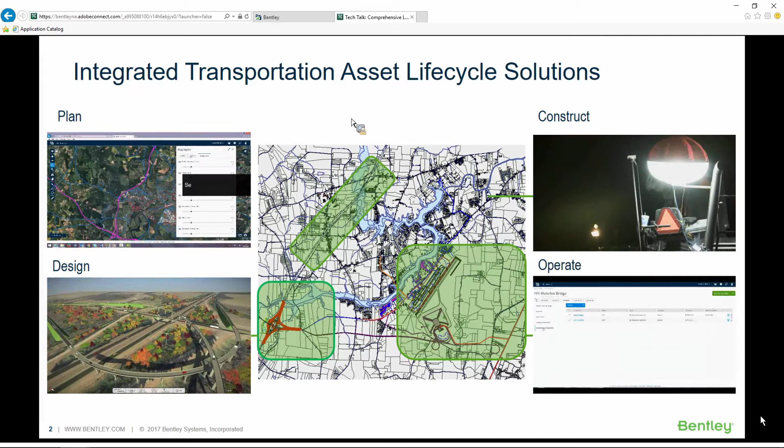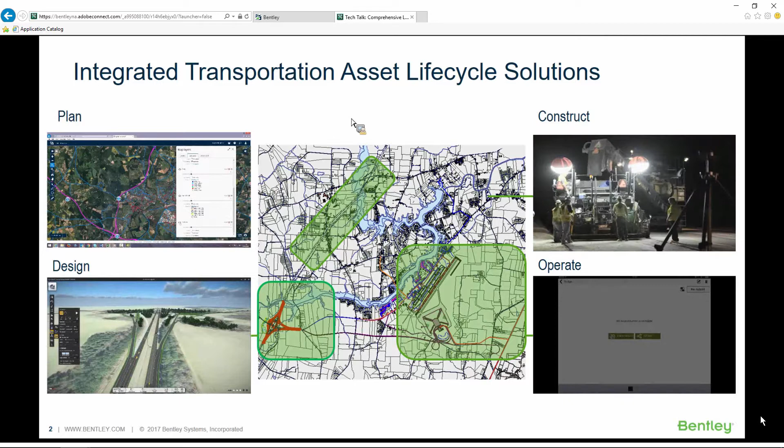From a point of view of AssetWise itself, from a Bentley point of view, one of the differentiators for us is that many of you know us from the design aspects of infrastructure. And what AssetWise does is it moves us also now into the operational and the planning aspects. So right now, from an AssetWise lifecycle perspective, we're going to show you today some of the network management capabilities from the planning aspects, how these interface into the design, right through to construction, and then finally the operation aspects of asset lifecycle information management. And we believe that this, combined with reality modeling, puts Bentley into a unique position in the marketplace to provide you with the solutions to perform asset lifecycle management.

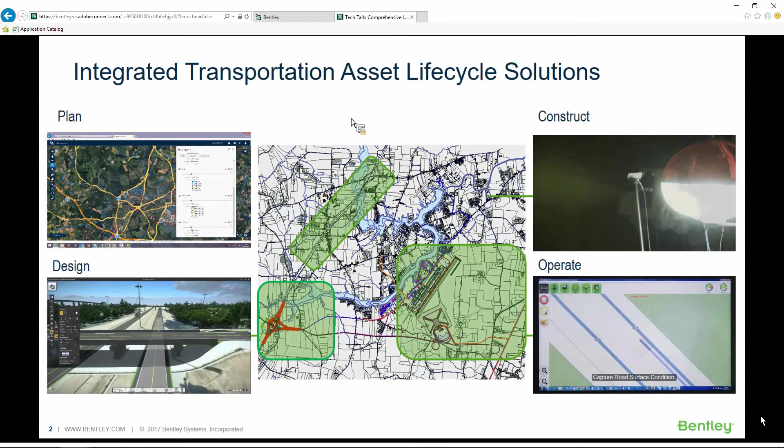So in terms of the Tech Talk agenda today, just to give you a brief agenda: first of all, I'd like to introduce you to AssetWise so you understand how the network management capabilities that we're going to talk about today fit into the portfolio. We're going to talk briefly about why we believe that linear network management is important from a business perspective. We're going to provide you with demonstrations of the new AssetWise ALIM linear network management, so Pano will be giving some live demonstrations.

And then we're going to talk about the effective tools that are part of the solution to support regulatory reporting like HPMS reporting and some of the things that we're doing now for network loading. Then we'll be just showing you some examples of some integration with reality modeling. These are the next steps that we're taking: being able to use 3D modeling during the inspection process with ContextCapture, and then being able to use design information to pass that through to ConceptStation for conceptual modeling of the network, and then also using As-built information to update the linear network afterwards. And then finally, I'll leave you with some closing thoughts and obviously take some questions from you.

So first of all, an introduction to AssetWise. Many of you have probably heard of AssetWise, and we've been obviously doing presentations on this for some time now. But for those of you that are new to AssetWise, AssetWise provides the operational aspects of lifecycle asset management, and we've broken it down into a number of capability areas.

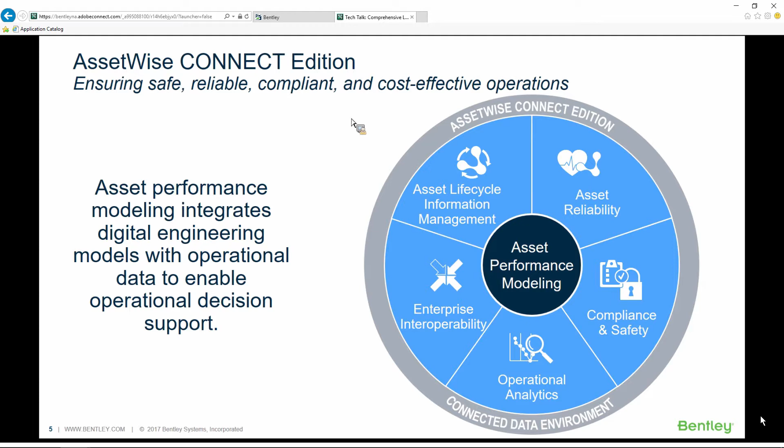So these are the capabilities, and I'll just talk about each of these briefly. First of all, there's the Asset Lifecycle Information Management. In this presentation, you'll hear that referred to as ALIM. And ALIM provides the asset registry capabilities, the linear network management that we're going to talk about today, document control and records management, and also configuration and change management. So this is really the information aspects of asset management and sits at the core of AssetWise.

The next component is AssetWise Reliability, and this is then the inspection processes. So AssetWise itself now has inspection capabilities, the ability to raise defects against those assets as well, and recording the conditions.

Compliance and safety provides a number of capabilities, but from a DOT or from a road network perspective, this is where the permitting and routing capabilities for oversize, overweight requirements are managed. There's operational analytics, and we'll be talking about part of this today. This is where we do the HPMS reporting from. So this is dashboards, analytical capabilities against all of the information either within AssetWise and also externally to AssetWise.

And then there's enterprise interoperability, and one of the important things is that we recognize that not all of your information is always going to be in the AssetWise suite or any of the Bentley design suites. So the ability to be able to interoperate with other applications - these may be your enterprise resource applications, it may be your crash management systems where you're storing information that you need to report against for HPMS reporting.

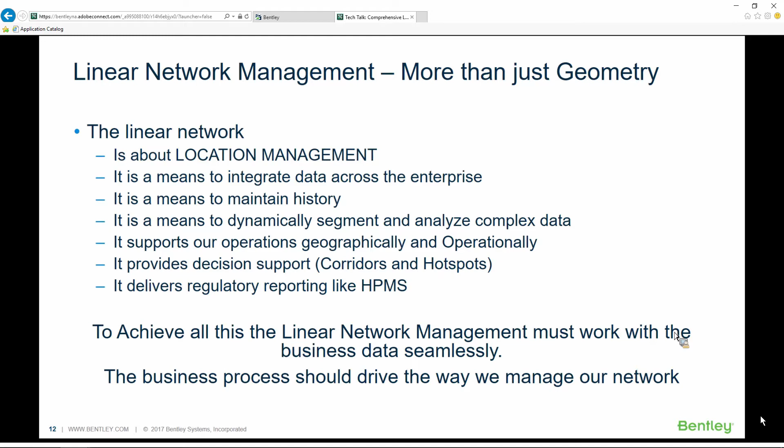And we also believe that the business processes should be driving the way that we manage our network maintenance. So we're going to give you some demonstrations of the linear network shortly.

Just to give you some background of the linear network management capabilities, what you're seeing today is new capabilities in terms of the user interface, but just wanted to point out that what's in the background, the engine, the linear referencing engine that we're using, is built on a time-proven solution.

It's been enhanced and has grown and matured over the past 20 years. So it has extensive global implementations. We have over 40 implementations of this in Europe. We have implementations throughout North America, India, Asia Pacific and Australia as well.

So this is a time-proven solution, although it's fairly new, the user interface that we're showing you today. That means it's got a high degree of functional maturity, and that's important from an age point of view, but it's also important from a global perspective.

So our solution has capabilities that have been requested around the globe and are then made available to everyone in a single solution. It supports numerous linear referencing methods, including NCHRP 20-27, and it also provides advanced functionality that Pano and Paul are going to be talking about, including capabilities like distance gaps and circular routes.

The other aspect as well that's very important is that I'm talking a lot about the business data, making sure the business data remains consistent. But it's also important from a GIS or a spatial perspective that the tool you're going to see today is enabling us to manage the centerline geometry of the road network.

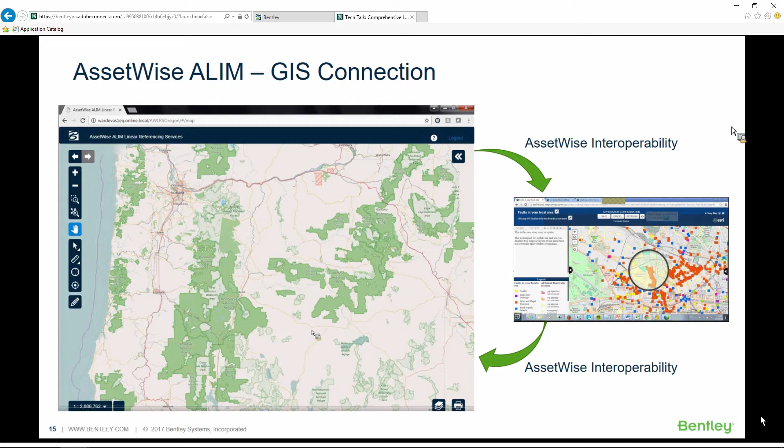So what I'm going to do now is I'm going to hand over to Pano Voudouris, and he's going to talk through these presentations of the AssetWise ALIM linear referencing interface.

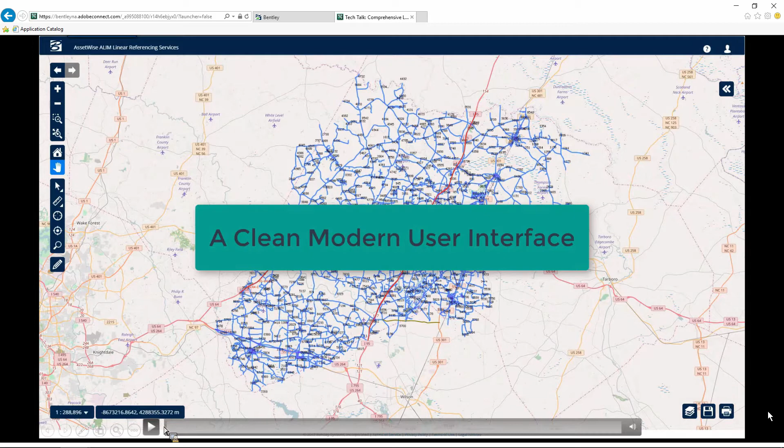Okay, so this is your map. What we're trying, let me start the video, okay? So what you see here is the map, and this is the environment that you're going to use for all your asset and network editing. We try to keep it as clean and as uncluttered as possible.

You see now the toolbar there, which is just business-driven menus, and you got the simple tools that you would expect for any web map. And what is on your map is with blue lines is your centerline data, and the red is the highway route, I should say.

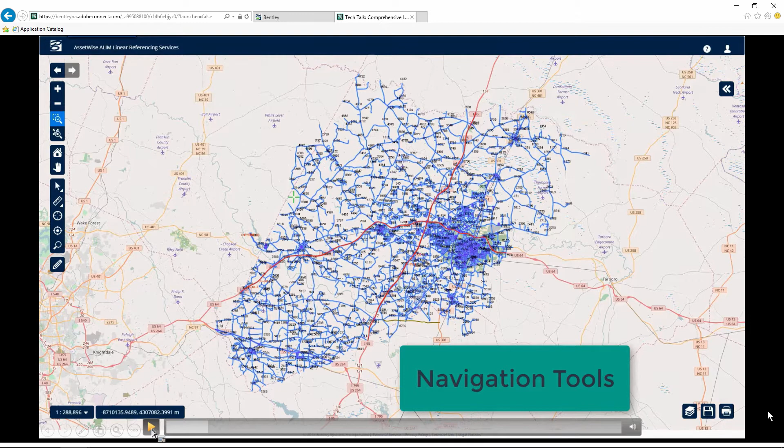If you go to your classic navigation tools, like your zoom in and zoom out, we're here. Okay, so classic navigation tools, zoom and pan and selection tools. We can also go to, you can see that on the top right you can zoom to extent.

You also got the map layer control tool. This is where you control all your layers. You can see all the available layers that you got, and it depends on where you got, if you got permissions to view them.

It's your classic legend layer control, where you can see the legend, change the transparency, and you also got background layers. What we see here is OpenStreetMap, and you can change the transparency of that. You can obviously move the layer order up and down, changing here to the Toner Lite map.

As I said, it's all about the permissions you got access to, and we also provide print options with a simple print where you can select your different paper size, DPIs, and scale, add in a title and a description maybe, and then it will provide a simple PDF map. Let's do that now.

So far it's basically what you would expect from your classic web map interface, right? We got masses of tools. This is your printing tab. Now there are massive editing tools, and so where are all these?

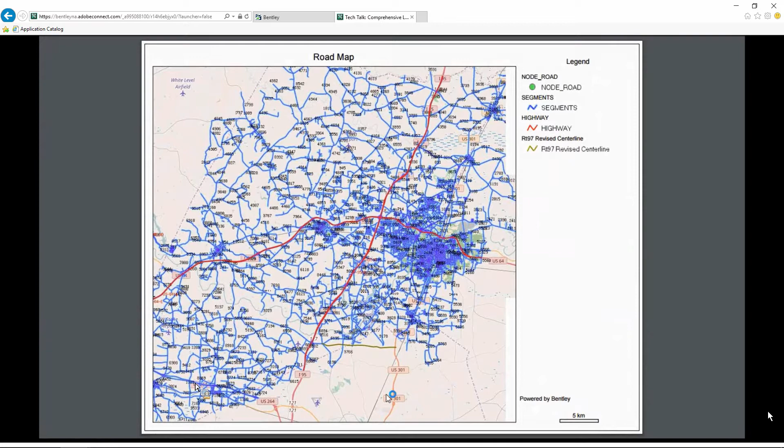The next bit I want to show you is about editing. So network editing again, and it all starts from the same environment and from that little pencil icon there. I click on the pencil icon, I select the layer I can edit if I have permissions, and I've got three tools now: the create, the create trace, or edit. So right now I'm creating something, happened in the video.

So I'm selecting my datum layer, and I'm going to now create, digitize a new datum, a new center line. You can see that I snapped an existing node, an existing center line node, and as per normal, as you would expect, click, click, click, and you just double click to create the datum.

Now, one thing I want to point out is that all the attributes that you see here are user definable. The length has been defaulted to the map length. The units of that map length you can change, and the units are set in the metadata, and you can set the accuracy and precision to whatever your requirements are. Then I enter the attributes and create my new datum.

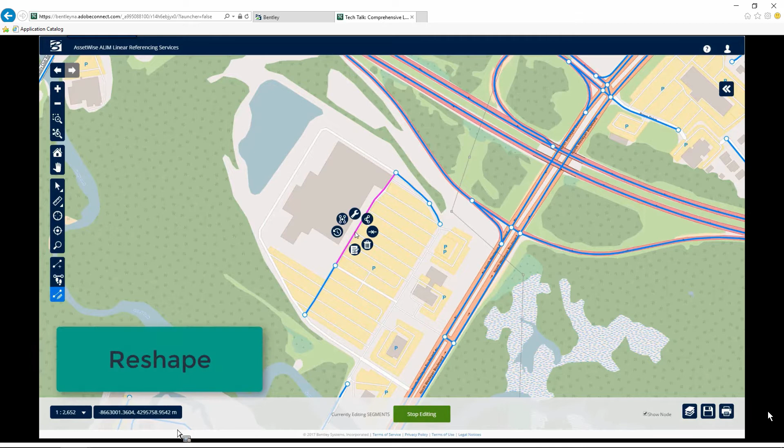So another option is reshape. Again, from the context menu, click on reshape. I won't go into the different tools that we got, but to say that I just want to move a few vertices around. So I click on that. If you see there is a replace and recalibrate as well. So at the same time I do a reshape, I can also choose to change the length, or I can replace, meaning it will just end date that and create a new one. I don't want to do that now, I'll just do a simple geometry reshape. Click on reshape, and my datum got reshaped.

Then I've got a merge, again the opposite from split. I just select my two new datums that I just split. You can see now there's only two options up here, so I can only split it or merge and do a shared reshape. Again, it will just ask me for the attributes of the new merged datum. Click on merge, that's it. Again, quite simple operations, work and quite easy to use.

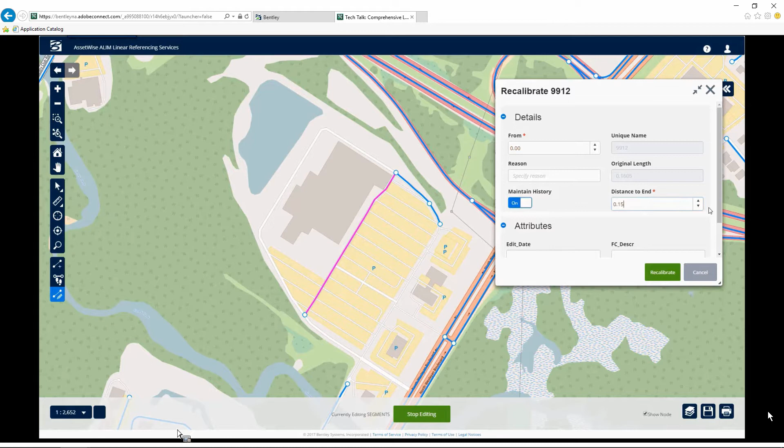And then I can end date my datum now that I merged it. So I got now my new datum, and I do a recalibrate. Recalibrate means just changing the length, the logical length of the section. Again, just to note that the units of that are user definable and defined in the metadata.

Just to finish it off, I can end date that datum. Click end date, it will ask me for the effective date, and the datum will disappear, and just end date the node as well. And we're back to where we started. So that was a quick example of a quick workflow of how you edit your network.

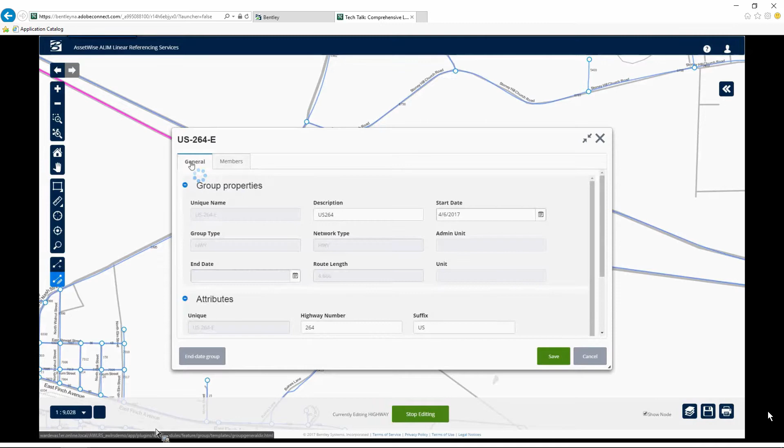So what about routes in managing linear and non-linear groups? Non-linear and linear groups are the routes. It's a very similar workflow, so I just selected a layer. This time I selected a route, the highways linear group. I click, and you can see the options are quite different. I'm now calling the attribute form, and you can see I've got my attributes and the members, the datums that make up this route.

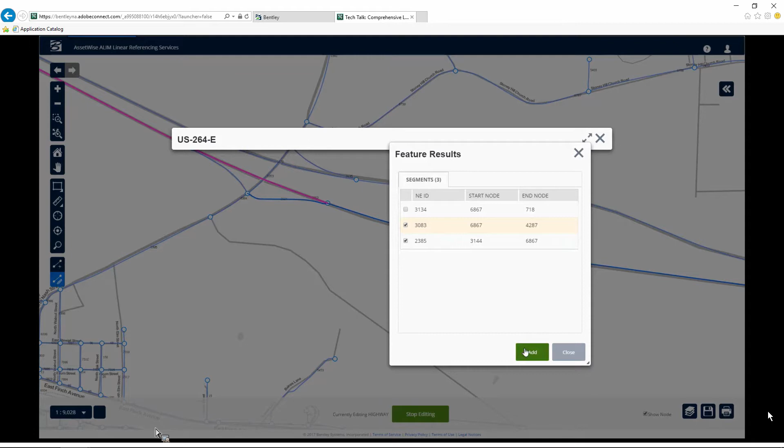If I want to add a member, let's say I want to extend the route, all I have to do is select. I'm selecting 3 elements, you can see which ones I want. I only want 2, and then add them as members. This is your add members option, or extending your route. You can see the members are here, and I've got all the different attributes, like member length.

Now I need to rescale because I just added 2 new members. I'm getting a message saying I cannot maintain history because I've done all the edits on the same day, but once I do that, you can see the new route shape has been created.

Just zooming out to see the whole route. Now, what about managing routes with gaps? I'm sure a lot of you have gone through that problem, so let me show you quickly how we can do that. I'm creating a new group with a gap. As before, I just create the group and put the attributes in - they're all just user definable.

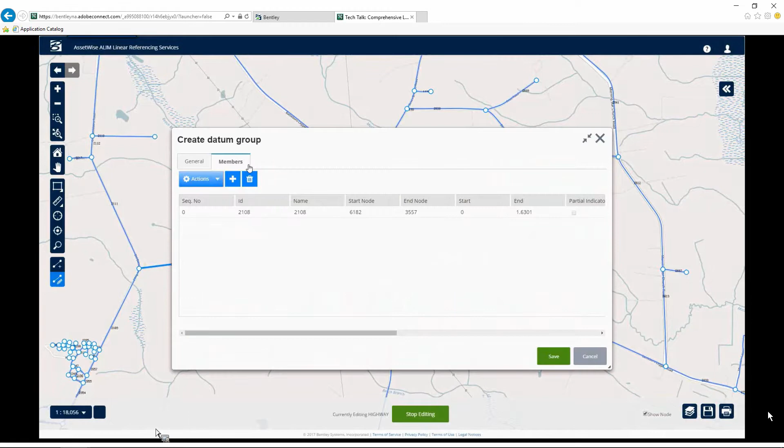I'll click on the save tool, which creates an empty group or route. Then I'll go and add members again like before - click on the plus icon, minimize that, and select the first one. This is my datum that I selected, now to add as a member to my route. Let's do it one at a time this time, and I select this one.

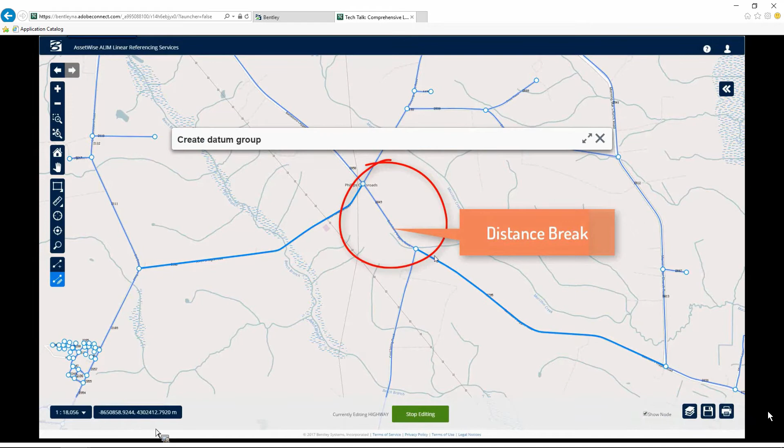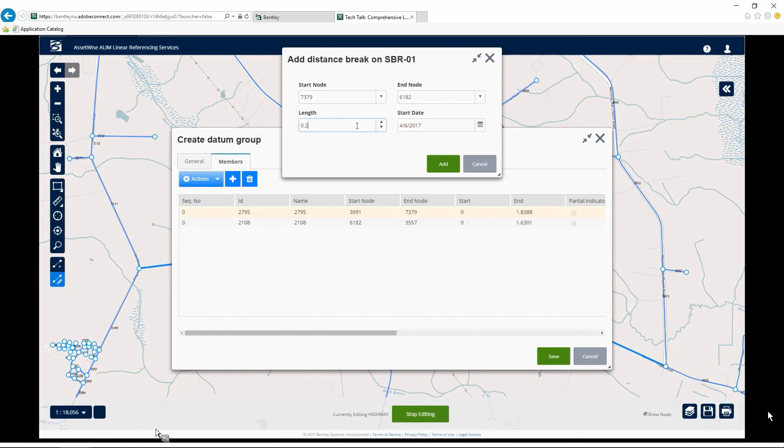You'll notice this has a big gap in between - this is what we call a distance break. I want to create that distance break because I want my route to be continuous. So I'll select one of my routes where I want to add the distance break, select the add distance break option, and it detects the nodes I want to create a break in between, and I can set the length. It can be 0 or whatever length I want. Click the add icon - this adds it as another member, like a virtual datum.

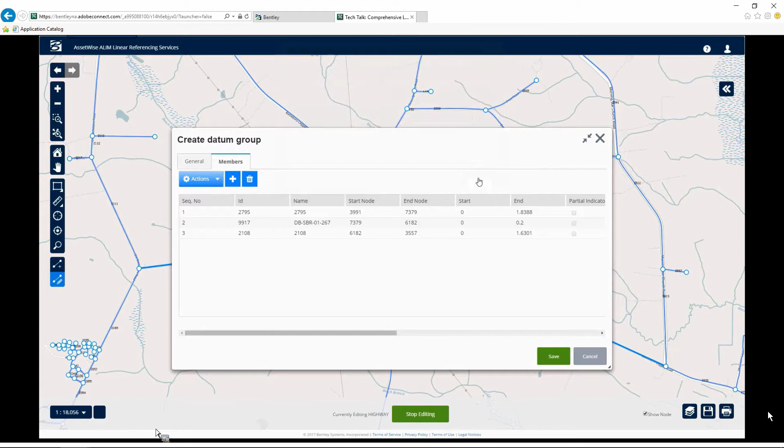I'll do a rescale again just to make sure I've got it all correct - same message because I did all the edits today. Now if I do the route check, it says my route is satisfied, the structure is satisfactory. Then just stop editing, and you'll see the new route, which is perfectly valid, with a distance break.

Circular routes - that's another thing we can easily handle within ALIM LRS. Here's a simple example: I've got my public footpath, think of it like jogging routes. So this is my datum, and another datum I want to reshape. Like we did before, let's just move one vertex to straighten it out.

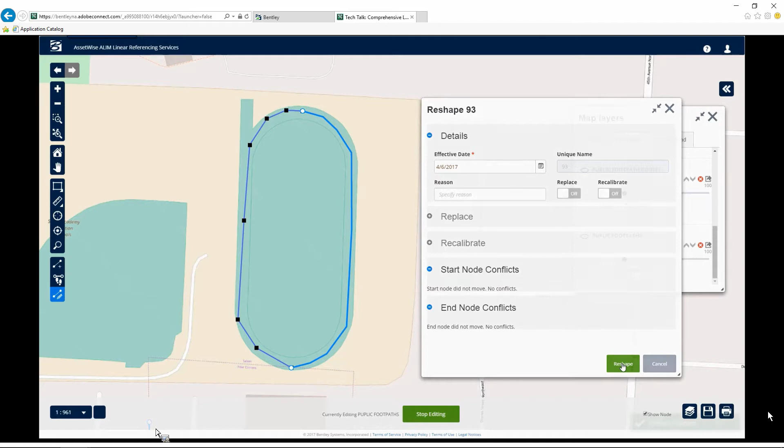Click on reshape, that's all fine and good. But when I go and see the routes that depend on this datum, my public footpath route, you can see it's still got the old geometry. So I need to rescale that - I need to edit that layer first.

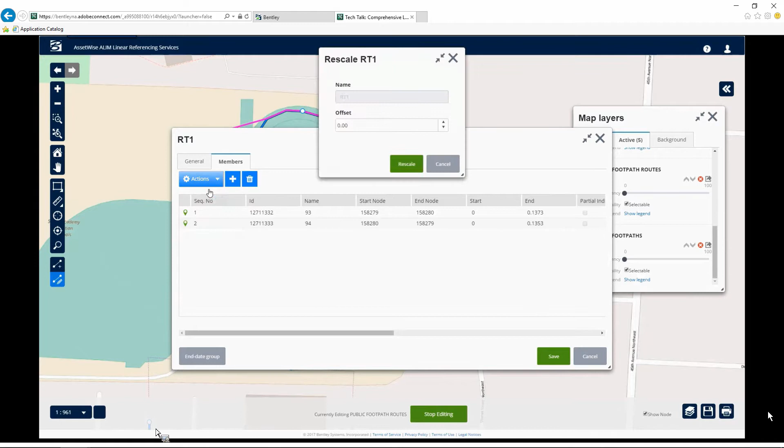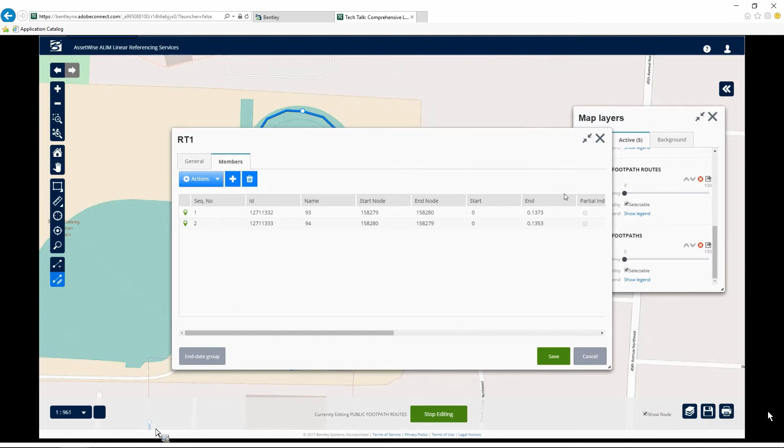You can see it downloads this vector data. Click to get the radial menu up, get the attributes up, and then go to actions where I can do a rescale. Because it's a circular route, it will ask me what's the start datum I need to rescale from. So I select that, click OK, and that's it - as simple as that, just like your normal rescale. You can see the new geometry has been created. All you need to do is define where the route starts from.

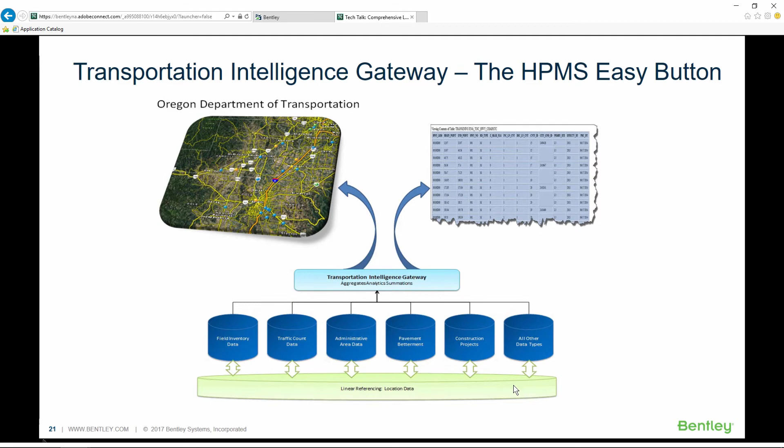In Oregon, they produced a fantastic video called the HPMS Easy Button, which was referred to in the title of this slide. What they were able to do with the Transportation Intelligence Gateway is greatly improve the performance and productivity of their HPMS generation process.

They were able to reduce the time by at least a third. That's valuable because now they can spend a lot more time on high value activities that a DOT engages in, like data analysis, data review, and data correction, and a lot less time on things that don't produce a lot of value, like data assembly. The type of cooperation they need from other groups to succeed drops, although the data sharing greatly increases.

So again, they use this for their HPMS system - it's all in one extract, and in their HPMS system, they can run any one data item without having to run the whole entire extract.

They can also use the effective date functionality within the TIG that allows them to run their HPMS system as of a specific date, so they don't have to shut down their network editing or asset editing operations to produce HPMS. We have ALIM users all across the world.

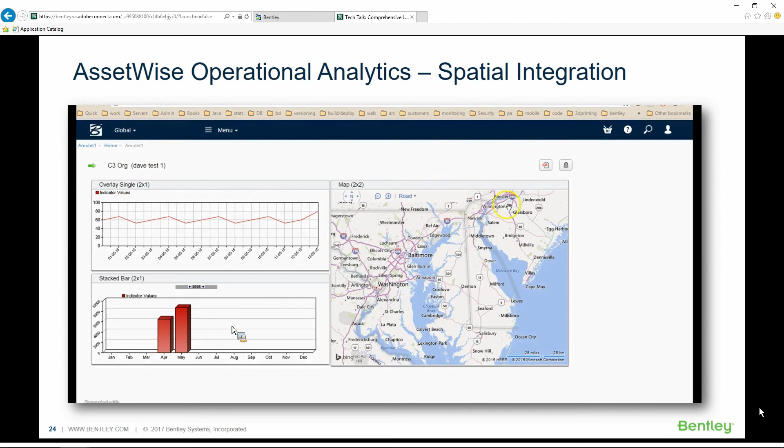So we've talked about the network editing and showing you demos, and we've talked about some of the business capabilities or the business tools that sit on top of there.

One of the things we wanted to do in this tech talk is give you some indication of how this fits in with the AssetWise lifecycle capabilities we're providing. In this next video, I want to show you how the inspection capabilities of AssetWise ALIM are being integrated with ContextCapture so we can start doing some reality modeling.

So in this case, this is AssetWise, the main dashboard, and we have a search capability. I want to search for a bridge, so I search for Waterloo Bridge. Now that I've selected it, I can look at the activities scheduled against it, things like appraisals, maintenance inspections, and so on. I can search and sort those by due dates.

Now I can say I'm only interested in the maintenance inspections. Once I look at those, these are all the inspections that are either due or have been completed against this bridge. I can select any one, and here's the inspection with its information and due date.

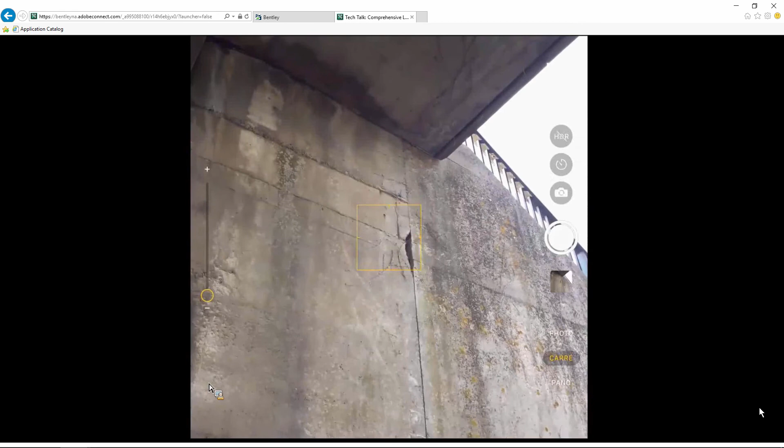One of the things we want to show now is that we can schedule that out for an inspector to go and perform the inspection. Interfacing this with ContextCapture, we can send an inspector out, and simply by taking photographs of any defects they find, they can process those and create a 3D model of that failure.

So you can see here, just by taking those photos on site, they've managed to create this 3D model of the crack. This can then be uploaded to the cloud, and once it's there, it's available for the engineer back in the office to view that information and make operational decisions.

If we now look at those inspection results, taking a look at that bridge back in AssetWise, here's all of the defects found against that bridge, some against the bridge itself, some against the spans, and the dates those were found.

If we select a single one of these, we can look at the records management—these may be design drawings or other information. In this case, the first one is actually the model of the defect that was found, and the engineer can view this and make decisions. So what we're trying to do here is optimize usage of engineers, collecting information out on site through an inspection process, and improving the decision support capabilities provided through AssetWise ALIM.

So that's just one integration with some of the reality modeling we're doing. The other aspect is from conception to operations.

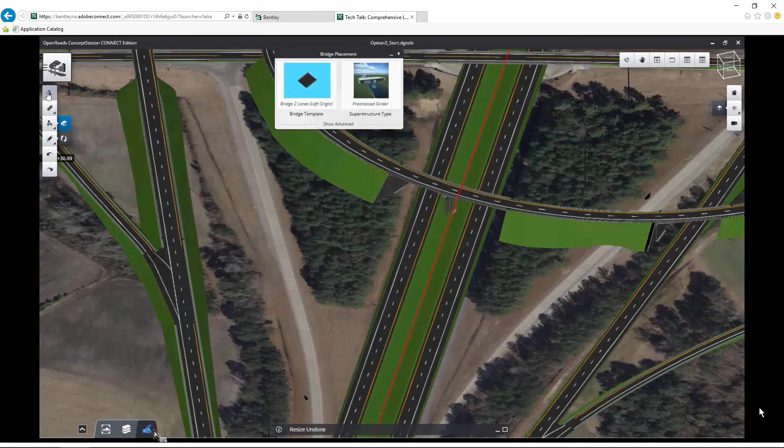So I just wanted to refer to here, this is ConceptStation. The idea of ConceptStation is that you can build up your conceptual models. If you have a new intersection that you know you want to construct, or may want to construct, using existing information, you can build up what that conceptual model may look like. At the moment, ConceptStation enables you to pull this information in from your GIS systems.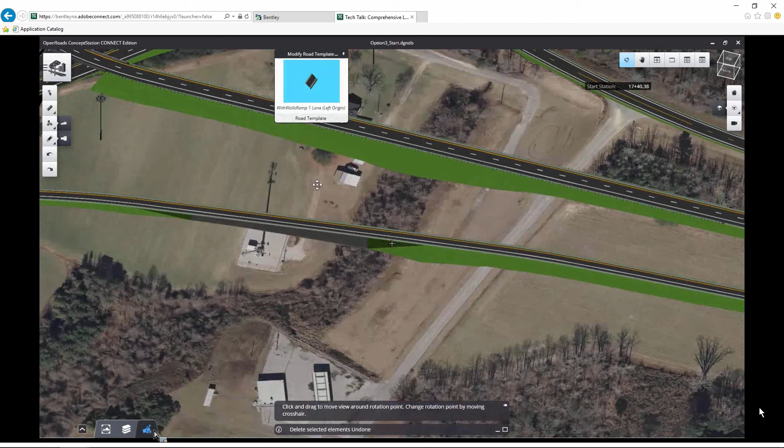One of the things being added now is the ability to import information from your AssetWise ALIM road network and asset registry—taking GIS information and business information so we can start doing these conceptual models, supporting you through that process. The important thing here isn't just the reality modeling, it's being able to make the business data you're holding in AssetWise much more valuable for these types of capabilities.

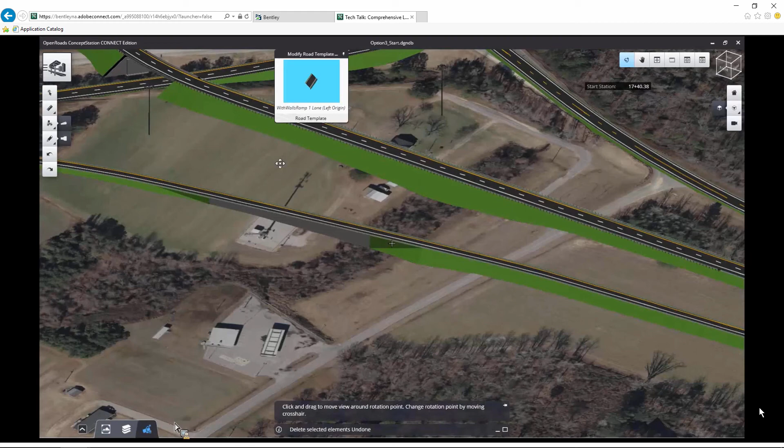Finally, one of the things we want to talk about today is as-built to operations—the ability to take as-built information and put that into your operational aspects. One of the things we'll show you today, Pano's going to take you through this video and show how we can do a copy trace from as-built information.

One of the things we're now doing is looking at automating this process of taking ProjectWise or as-built information from DGN drawings and using that information to automatically update your asset information and your road centerline network.

So Pano, I'll pass this over to you. Okay, thanks Russell, again.

So the idea here is that we got a new center line that has been provided to us and made available to AWLRS. That's the center line from the as-built, for a new airport access road.

So what we want to do is zoom in, and we can start editing. I'll select my datum, and what I want to do now is edit the datum layer. Click on Start Editing, and this time instead of creating the new datum just by digitizing, I want to trace it against that new as-built.

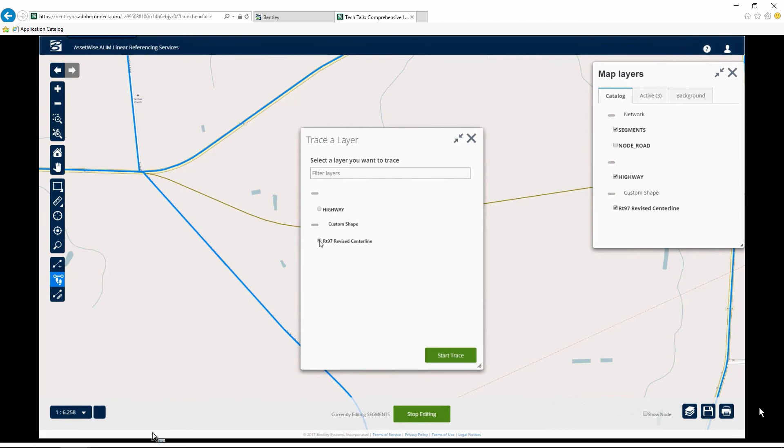You can see that I've got a trace layer, so that's my drawing there. It becomes red, and I can then start tracing on top of that. I'll just do it slowly. You can select any kind of data—it can be a shapefile, a DGN layer, any vector data—and you just trace along it, and double click.

As per usual, as you would create a new datum element, you just add the attributes, add the attribution in there, and then save it. I think we need to put just the description, okay now the travel direction, and then click on save.

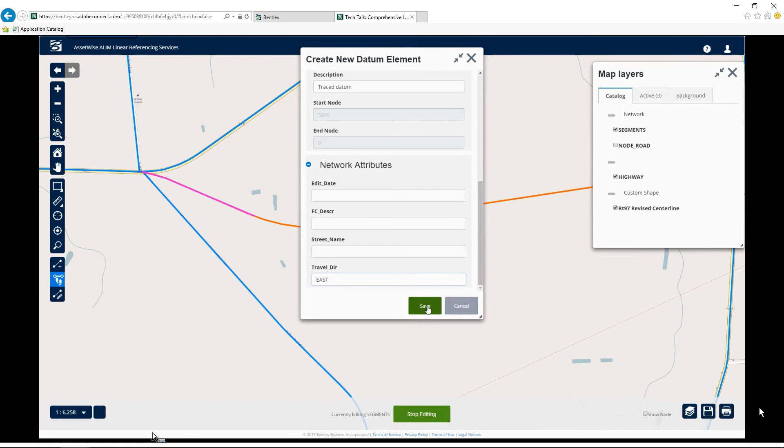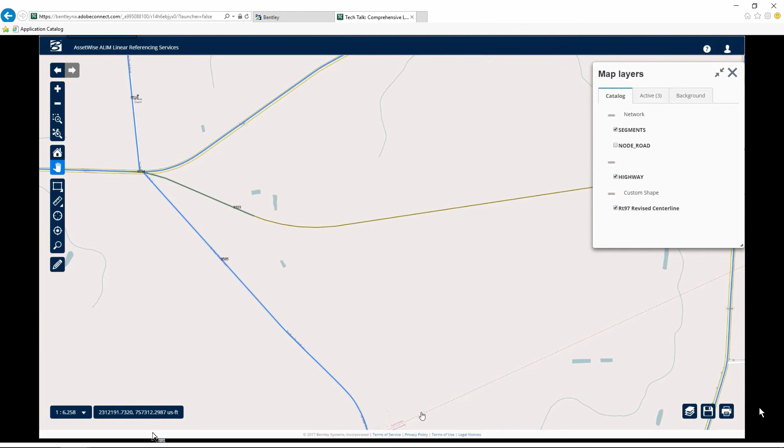You can see that little message that appeared, and then just finish editing, and my new datum has just been created. On top of that, I can add it to a route and so on, like I showed you before. I think that's it for me. Back to you, Russell. Thanks, Pano.

So just from closing thoughts and some of the capabilities we've shown you, we've talked about the road network and some of the integration with reality modeling. I think this is one of the unique differentiators of Bentley, that we have these tools and we're bringing them all together.

So from a closing point, some of the future capabilities we're able to offer and some of the things we're working on today: with reality modeling, being able to go out and collect data from a number of different sources, whether that's fixed-wing airplanes, photographs, or drones. We can collect this information and put it into a format that makes it much easier to access alongside your business data.

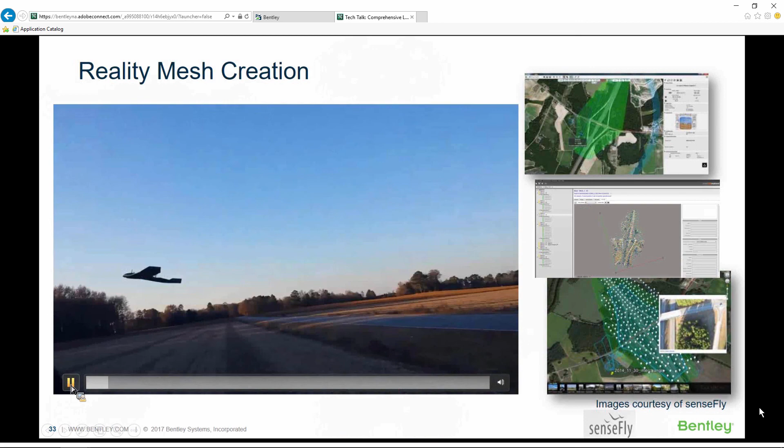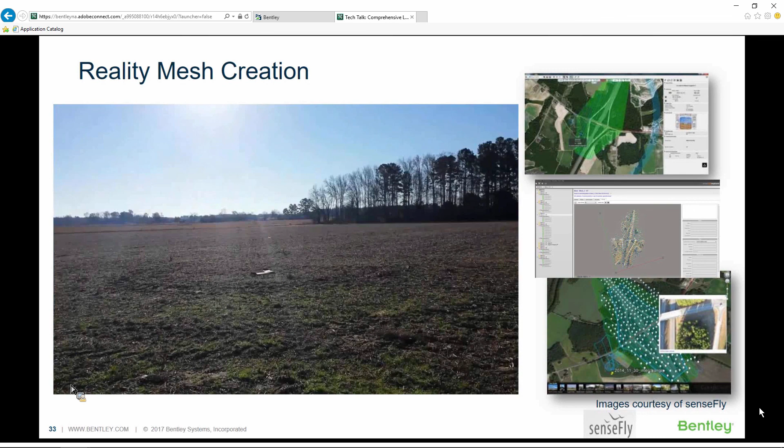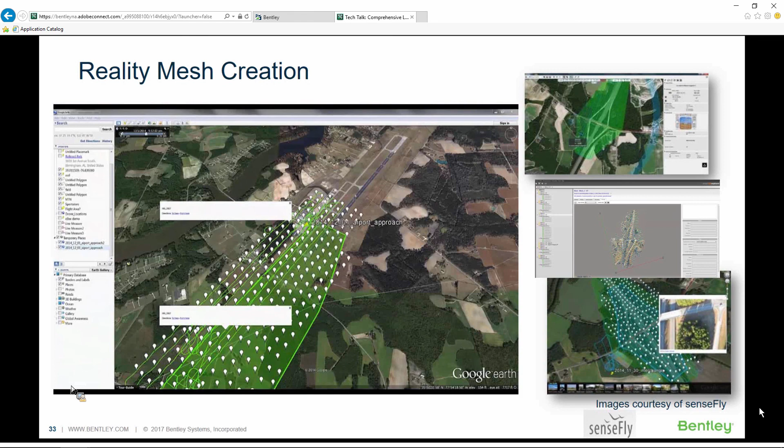So this is an example of how simple this is—we can send a drone out. The drone is programmed to fly over a certain course to get all the relevant information it needs. In this case, here's the route the drone took, and this is a survey we actually did with it. Then using that information, we're able to create a reality mesh, laying it over the GIS information, and create these reality models.

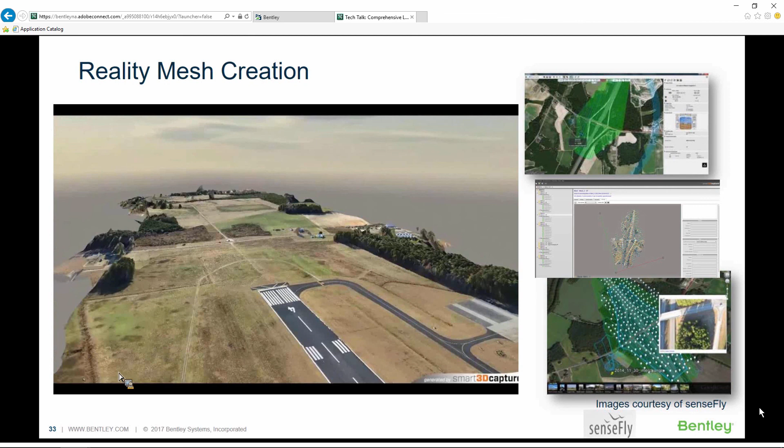So these are the capabilities—I think this is the next generation from a GIS perspective, having these types of reality models as we go through the process.

This really is food for thought—these are capabilities we're now working on, taking what Pano showed you and putting it into a complete 3D reality world. In this case, we can select a bridge, and simply by selecting it, AssetWise is able to tell us all the information related to that bridge, including inspection and attribute information.

We can also look at load assessment information, all the relevant information we want against this data. So this is taking the AssetWise asset lifecycle information management and putting it into a 3D world that we can look at.

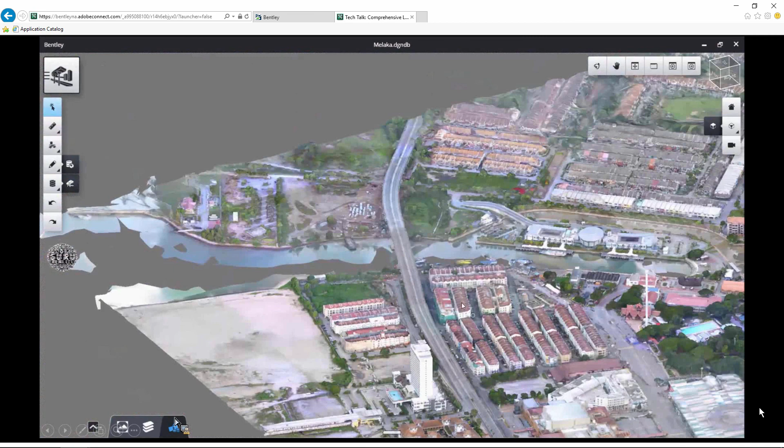So I think these are the differentiators—this is an important thing, that Bentley is bringing all of our tools together to provide these types of capabilities. So with that, that's the presentation we wanted to give today. Hopefully we've given you enough information about the linear network management capabilities.